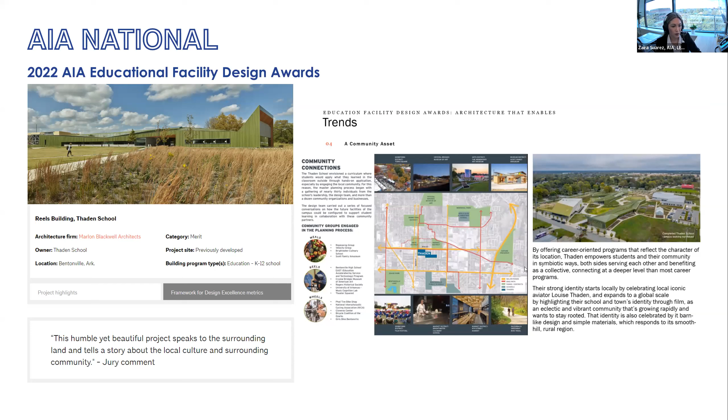You see here, I've included the images they offered in their presentation for the awards some weeks ago. We hope that this is something we'll learn a little bit more about with the presentation today.

A quick introduction: today we have Josh Matthews, AIA, who's Senior Associate and Project Manager at Marlon Blackwell Architects in Arkansas. With that, I'll go ahead and stop presenting and allow Josh to tell us more about the Reels building.

Well, hello. Thanks for asking me to join and talk about the Thaden School. It's a real privilege. As was mentioned, I'm Josh Matthews, a Senior Associate at Marlon Blackwell Architects. The PM, I've been involved in quite a few projects here in the last 6 or 7 years.

The Thaden School is a project that I was involved in from the very beginning. It's kind of a passion project. When we were approached to start looking at some of the programming and master planning, I was a part of that team, and ultimately was a part of each campus building and the overall project development and CA for each one of the facilities.

We've just finished up the majority of the work from the first couple phases in the last year. Today we want to talk a little bit about the work that we do, the region this building's in, and a little bit about the campus, but really wanted to focus on the Reels building, which is part of a larger group. So with that, I'll go ahead and get started.

We joke about this because Arkansas, as I said before, is pretty rural. We have a couple different regions across the state, really made more by different landscape features. We've got the Ozarks in the northern part of the state, a wooded, hilly area. We have the Delta in the center part of the state that extends into Louisiana. Right at the northwest corner of the state, we have the Springfield Plateau, which is actually probably more akin to Kansas and parts of Missouri and Oklahoma than any parts of Arkansas. That's where we're actually located.

When we were looking at how place impacted what we were doing, we knew the landscape was going to have a dramatic impact on the way we developed the campus. Because we were doing master planning on top of actually designing a collection of buildings, we needed to figure out what the motivations and inspirations were that we could find here in this place to help us develop this campus.

The campus itself, highlighted there in orange, is a 30-acre parcel. It's bifurcated by a small street, not quite a county road. We knew from the brief that the school wanted this to begin to feel far more like a college campus than a traditional high school campus.

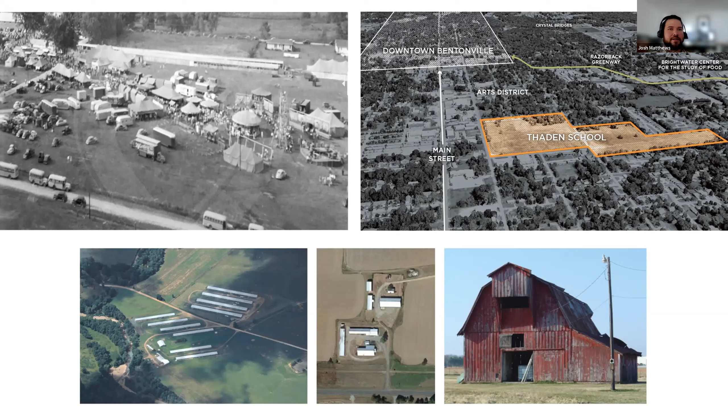I'd be remiss if I didn't mention this—we were part of an amazing team working on this project. We had Eskew Dumez Ripple Architects in New Orleans working on the master planning and some of the early programming, as well as the home building shown here.

We had Andropogon, a landscape architecture firm, working with us on all the landscape. Then Marlon Blackwell Architects participated in programming and landscaping, and we basically completed the other structures—the bike barn, the Thaden home, which is a relocation of Louise Thaden's childhood home onto the campus, the Reels building, the Wheels building, and the Performance building. So that's kind of the splits. We had an amazing team, and it was such an awesome process to work with such talented folks, and to come up with this.

When we talk about the different landscape components, we call it layering by design. You've got 30 acres and a bunch of single-level structures, and you also have a budget and a program target square footage. Really quickly you realize you're not going to create a ton of density with building, but you have to be strategic about creating outdoor spaces appropriately scaled to the adjacent buildings, and using openings, connections, and vistas between buildings to create a sense of connection.

One thing really important to the Thaden School team was that, like a college campus, this campus wasn't just a collection of one type of building slightly modified, but you could clearly see diversity from building to building. They saw that as a bonus—that you'd have maybe two different architecture firms and a historic house existing on the same parcel.

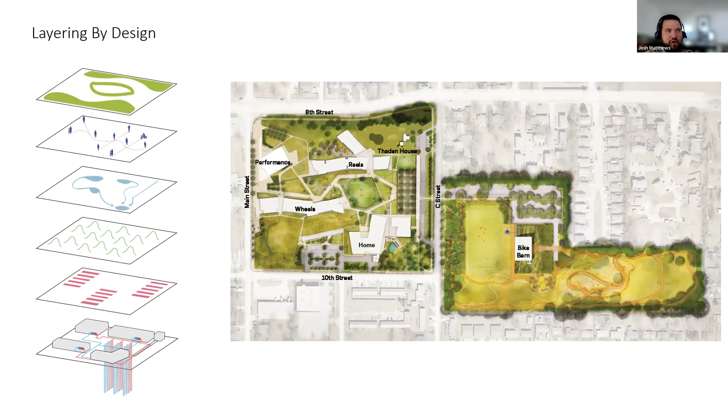It's important to mention the parcel is 30 acres, split into two parts. The team decided to keep it infrastructurally heavy on the western parcel and have maybe one structure on the eastern parcel, so we could have a denser portion of the site and a more open, landscape-oriented portion with strategically located parking areas, so you wouldn't be constantly moving through parking.

When all of that gets layered on top of itself, you begin to see a landscape that really created a lot of happy accidents, as we call them. When you're walking the campus, moving from building to building, there are natural vistas where buildings and entries of other buildings are naturally framed, and adjacent to those circulation paths there are lovely seating areas.

The way the gardens, the composting, and the cafeteria intersect with basic student and teacher circulation rhythms, it's just a really harmonious place to live. There's tons of activity, and it's a really cool place to be. It's all kind of out in public on display.

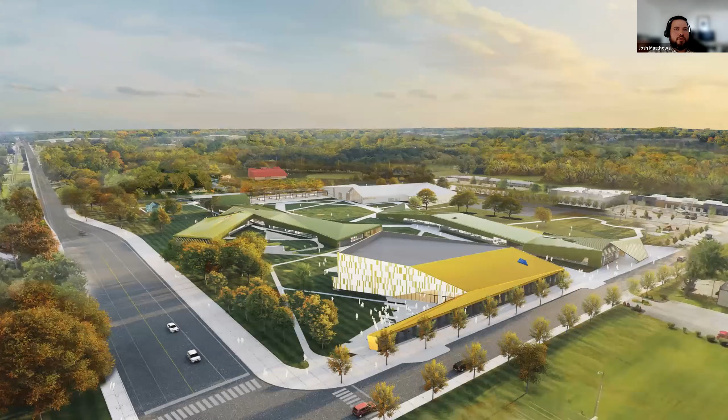This is some of the early ideas about what that campus would look like. You can start to see how the diversity of structure was really part of the overall richness of the campus experience.

So here's where we find ourselves today. This is actually right after we finished construction on the performance building, the gold and white building here on the corner. You can still see some remnants of construction around, and there are still some offsite improvements taking place that are in the city of Bentonville's court. These are the different buildings.

The bike barn, like I mentioned, was a project that we completed. The home building was Eskew Dumez Ripple. The Reels and Wheels buildings were the two classroom buildings that, although they look pretty crazy in overall form, are really kind of double-loaded corridors with classrooms on either side of each corridor, really simple. So it was a challenge to do something interesting that responds to the overall landscape forms, which we'll get into.

And then the performance building, which is really a world-class performing arts center that can be used by the community, but it hosts band, choir, and drama functions for the campus.

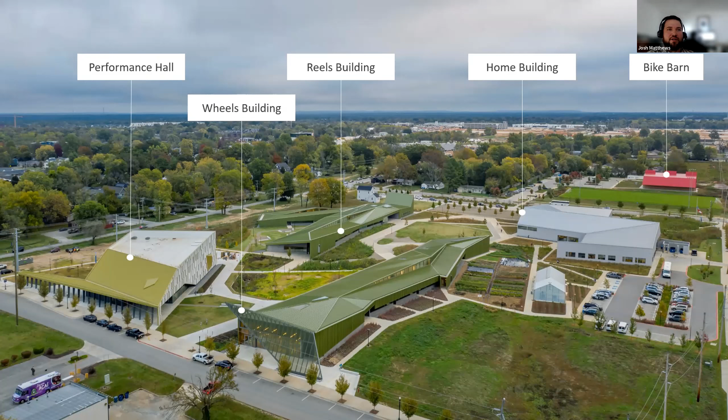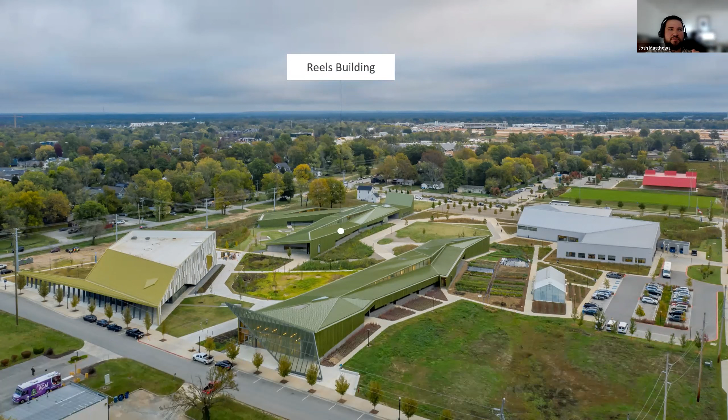For the sake of this conversation, we're really going to focus on the Reels building. I do think it's important to note that a lot of the DNA from this building ultimately impacted a lot of the other buildings on campus. So this will give you a little bit of a taste, but there are some other interesting things going on out here too.

I think it's also really important to note, from a phasing strategy standpoint, the Reels building and the home building, the white building and the green building, were the first two buildings to be constructed. The second green building, the Wheels building, followed by about 1.5 years, and the performance building was 2 years later, and the barn kind of followed its own path. So there was a lot of activity for a 4 or 5 year period here on this campus.

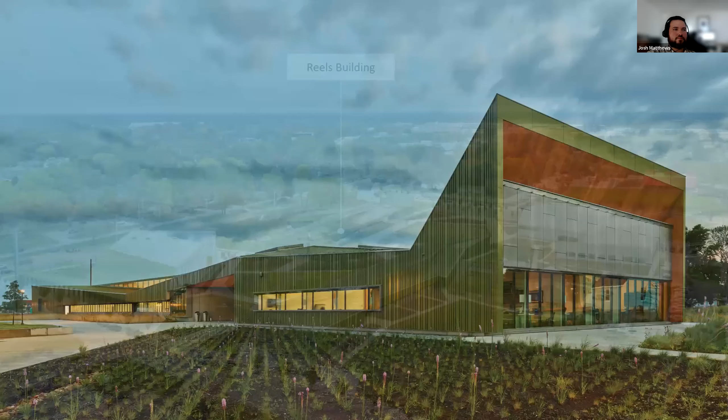Getting to the Reels building, its program was primarily the arts and administration building. This was the building that housed all the administrative functions for the campus. It had a lot of science classrooms, a large art wing, and then a Reels lab, which is kind of a recording studio. So it housed some basic classroom functions, but those are the core programs that were in this building.

One of the challenges our team was confronted with early on, and I know it's not unique to this project, was that the aspirations far outweighed the money available to build what you're seeing here. Although these buildings were relatively modest, we built this building for about $270 a square foot. When we first started talking to the school, we were lucky to have numbers showing anywhere north of $200 a square foot. So we knew we had some work ahead of us.

One of the things we talked to the Thaden School's leadership team about a lot was, if we're going to do this, we have to be really tactical about the material palette and really the construction method. We have to figure out where we can maximize value here.

Early on, without doing a lot of explorations, we knew we were going to have to use modest materials: metal panel, metal roof, all storefront, fiber cement panels, thinner than we would like to see, but I think they turned out nice. Then some marine grade plywood for all the ceilings, and a lot of gyp. So we had that palette, and we knew that was going to be the case. And believe it or not, all the buildings end up having a similar mix of that palette, that makeup. So that was something that was about how we could maximize those materials.

One of the things too - the building is obviously green. If you're in this part of the world and you tell anyone we're with Marlon Blackwell Architects and worked on the Thaden School, they'll kind of look at you blankly. But when you say 'oh, the green building,' just about everybody's face lights up with excitement or disgust - but everybody knows where it is.

The green was something we worked with Andropogon on, to understand the different plantings they would be using and the color palette the landscape would have throughout the year. There are some beautiful images in this presentation showing those Osage prairie grasses against the green building, and they're really quite spectacular. What's hard to capture is the way the color of those grasses changes and blooms throughout the year - I'd say every 2 months you're getting a different color, whether it's wildflowers or just things going dormant and turning different shades of brown. In some seasons the green really accentuates the color of the landscape, and other times it creates a lot of harmony with it.

Going back to that modest means and materials - this is just a simple box rib metal panel. Panels have done a bunch of crazy things in the last couple of years, but back in 2017 they were about as cheap as you could get in terms of building material. We knew we had to elevate the material, because just down the road there are warehouses using a very similar material system. Through color and the actual coating of that metal, we realized we could take something pretty modest and make it something special.

Right here you're seeing the northern face of the building. There's a great little sitting area and one of those porches carved out. This is actually the main entrance - if you show up to the campus and park in the parking lot and walk across the street, you'll end up walking into this porch. From this porch, you can go to either of the two north wings of the building or into the admin area. So it really ends up becoming the primary entrance for the building, through the center.

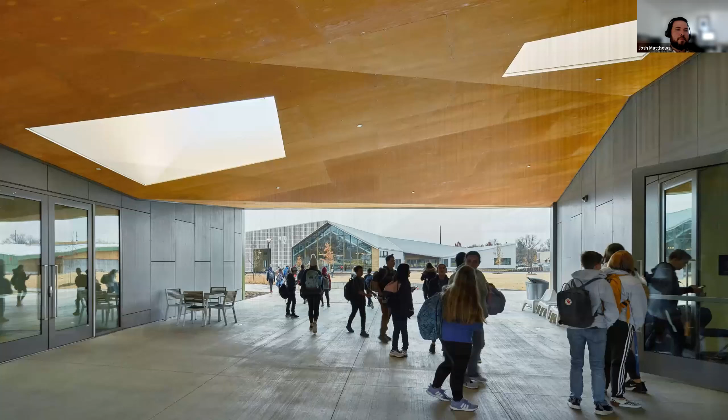The porches themselves are pretty great. If you go there, depending on the weather - if it's really hot, these dog trots have a beautiful breeze, and students and teachers are hanging out catching the breeze. If it's a rainy day, they're out here playing ping pong. Any other day of the week, they're having a science class in these spaces. These spaces really do create a lot of activity that otherwise would just be kept inside a building, in a back corner, which really makes the campus feel like it's constantly alive.

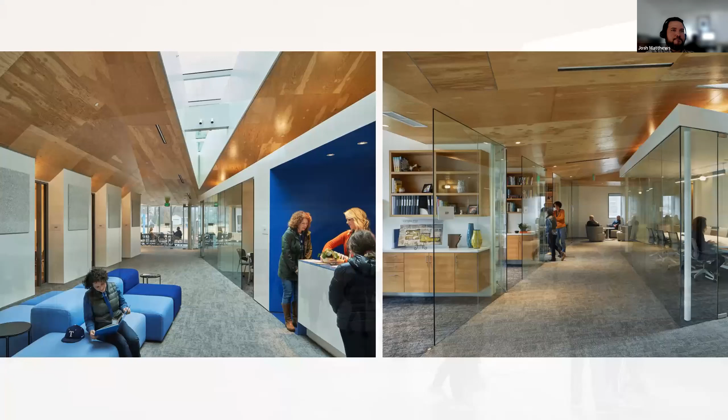So the admin area, which would have been that area to the left, moving to the east, was also something we put a lot of thought into with the school leadership. How could we create spaces that would really encourage student and teacher overlap and interaction? Creating admin spaces with lounge areas and large meeting rooms where teachers could be accessible by students. Students could come in, have questions about homework, really just have life-related questions, and they would have the spaces to casually sit down with teachers and ask questions. Hopefully those kinds of conversations would lead to more meaningful conversations about careers and life. It was really intended to be very welcoming and transparent, so there was never this idea that teachers could slip away and hide from the students - they were always accessible.

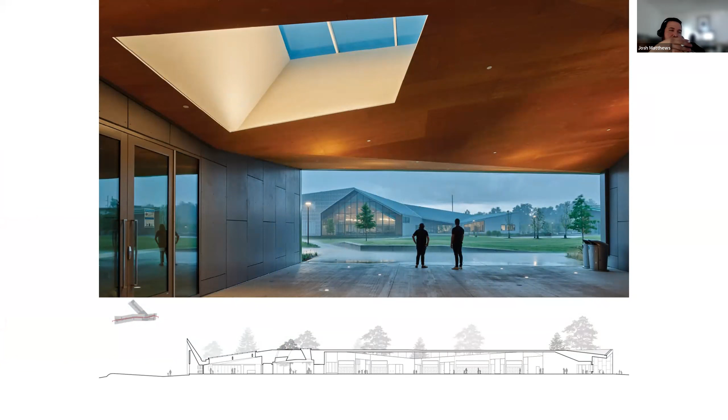Making sure that - you'll see a trend of this - deep within the center of the building mass, we were bringing light into those spaces, making sure that daylight was really getting deep into those porches and classroom areas. And like I said, even on a downpour, it's not a bad place to be.

I want to talk about one of the strategies we employed, which goes back to some of our early conversations with the Thaden School leadership. We took a quick tour of some independent charter and public schools in the area with school leadership, and one thing that was so interesting to these educators, which we never thought about, is they said if you talk to faculty and students, really what they'd say is...

All of the activity and conversation and life within a school building takes place in the corridor. Yet they were shocked at how little attention architects would pay to those corridor spaces. They were just very utilitarian, helping funnel people from one class to the next. They really weren't spaces you wanted to be.

Knowing we were starting to shape these roofs and deal with scalar issues, we saw that as an opportunity, from two perspectives, to begin peeling those roofs away, using that pitching and rolling to introduce clerestory lighting, which would bring light into the core of the building, into the spaces with all that activity. So we knew what we wanted to do.

Early on we were working with our mechanical engineer, CMTA, another wonderful team member. We started pitching ideas about daylighting strategies that you could sketch out on the back of a napkin, and talking about bringing daylight into the core of the building.

There are some great other facilities on campus, and there will be some more work—I think Architectural Record is doing a spread on this soon. We've got some literature coming out. It's a great place to see. If you're ever in this area, look us up, we'd love to take you on a tour. It's been a lot of fun to work on.

I think just seeing the way that students almost gravitate towards some of these spaces—as a student, when I was younger, I didn't really have that connection with the places in which I learned—but you're seeing how architecture really begins to change the way that students think about the places they spend a lot of their time in during their formative years.

It's kind of the campus as it sits today. Obviously, construction—all of this is green now. There's not a lot of dirt patches anymore.

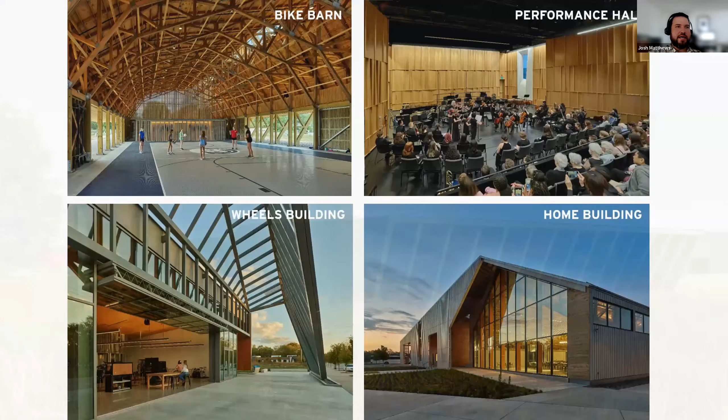Absolutely, let me go back a little bit here. Actually, this may not be a bad one to talk through. Early on, the athletic program knew they wanted basically soccer fields, and that's actually what you see here next to the barn. The barn itself was really supposed to be kind of an athletic pavilion for soccer fields—it's an open air structure with some conditioned enclosed lockers and bathrooms. So on a hot day or a rainy day, the porch of the barn would be a place where people could be out there and watch a soccer game.

What's interesting is this has kind of changed. It's been a few years, but there's now a cyclocross course, which you can kind of see here in the corner, and there's regional cyclocross events that take place here on campus—it's kind of the bike barn now, so the barn itself is the backdrop for those activities. What's actually hard to see in this image too is this 15-acre parcel on the eastern parcel has another bike skills course. So there's some bike-related athletic programs that are starting to find their way into this region, and believe it or not, there are other states and other schools participating in some of these events. That's been kind of cool to watch evolve and grow.

I think, knowing they were starting a new school from the ground up, they knew the athletic program was going to have to grow with them, because in Northwest Arkansas, football is king, and they don't do that, so they knew that was going to be a challenge. We're actually talking to them right now about an athletic facility so they could do basketball, because they now have a basketball team with really nowhere to practice. The barn has a basketball court in it, but it was really more a place for, as Dr. Marsh said, students to burn a lot of energy. So the athletic piece is kind of ever-changing, but they do have a regulation soccer field and some pretty nice facilities to support that. The rest is just an ongoing dialogue as the school body grows—what people want to see and where they're putting their money. So I don't know if that answered the question, but yeah, that's ongoing.

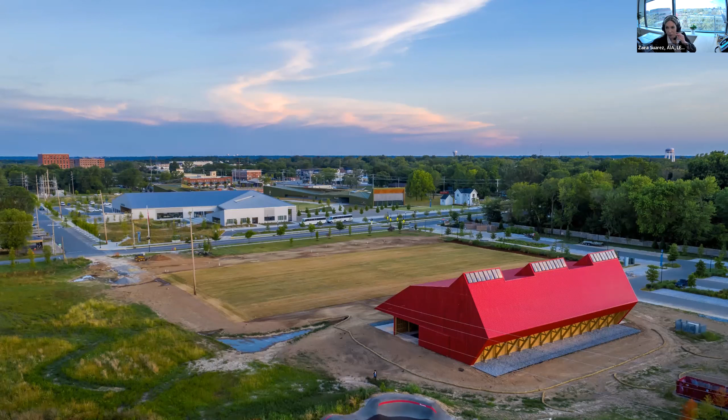Anyone else would want to ask anything?

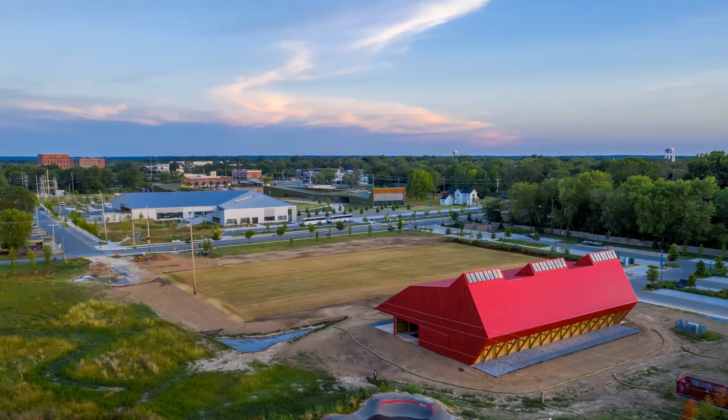I just had a quick question, and I really appreciate the time you put into the reels. That front part really reminds me of one of those camera attachments. But I was really curious how you dealt with the water, with that slope on the roof, and the drainage there.

This one right here, you're talking about this image? Yeah, with that slope there. So here's actually what's super interesting.

It's actually completely hidden in this view, but if you look in the grass here, there's two gravel runnels. There's a really large gutter right past the line of the glazing, which you can't see here but probably could in an aerial photo. All the water running off the roof hits this large gutter and daylights above grade in the last two bays, draining to an area drain that slopes to the area where this photo is taken, which is actually a few feet lower than the building — it's a retention area, and it drains that way. It flows that way, and you can kind of see it in this image too.

It's a great question about the water strategy. The building itself acts as an overflow — the entire perimeter of the roof has about an 18-inch by 4-inch roof drain with drains at the low points. When those drains get overloaded, the water pours over the edge of the building. In the landscape, there's a gravel skirt in some areas, and in others, area drains or rain gardens. As you walk around the building, there are areas where we dealt with each of those scenarios a little differently. In this particular case, there's just a large gutter that was piped into this and then onto a rain garden.

Very good, I got one. Josh, have you heard anything unrelated to this project — people in a community setting talking about community amenities, saying we should do it like the Thaden School? Are people referring to the effect of this project in some other context, recognizing a piece of it's successful, or something they've seen or interacted with?

I'd say in two very specific ways, the answer is yes. I wouldn't say everything we thought would become a communal asset has been perceived and used that way. The exception would be the bike barn, and the way the pump track and cyclocross track is used on weekends. That whole area has been seen, perceived, and used as an open communal asset. There have been some security challenges, and the school has to monitor that activity and make sure the facilities are unlocked, but it's become a bit of a communal hub.

The other thing is the Wheels building in this image, with that large folding door — this is their bike lab that opens onto Main Street, the westernmost street. The idea was that it would be a place for students to disassemble bikes and do different work; it's got a metal and wood shop. But as an educational tool to get community members excited about riding bikes, they actually hold workshops here — not necessarily run by students or faculty, but by other community leaders, like people who own bike-related tourism businesses or bike shops, who come and hold a workshop. They use it as a bike-related educational classroom space.

Even simply as a landmark-looking building because of the way it sits on Main Street, there'll be little flyers around town saying, 'show up here for Saturday morning's ride' — little things like that. I'd say that was very organic. The hope was that we provided the structure and infrastructure that would make those things happen, but it wasn't like a week or even a month or two after we finished the building that people were saying, 'we gotta go hang out at that place.' It started slowly and organically, but you're now starting to get that murmur of how these spaces are being used.

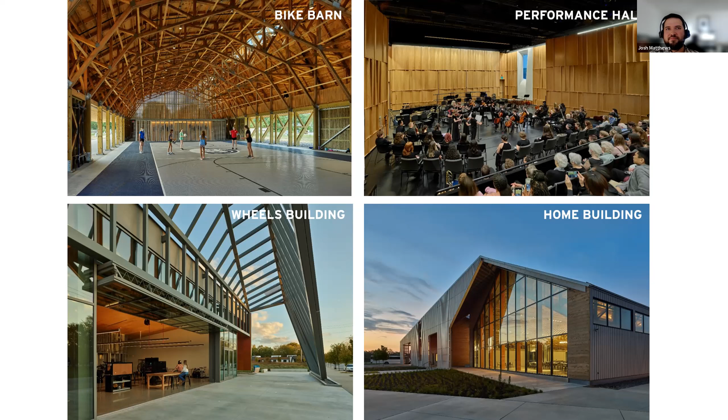It did— I'm sorry, can you hear me? Barely. Zaira, we have an echo. Okay, can you hear me now?

I can, okay. We have a couple minutes here, but I did want to ask, it seemed like in your original planning, kind of dissected plan there, you were showing geothermal wells. So you do have a very active sustainable portion of this campus.

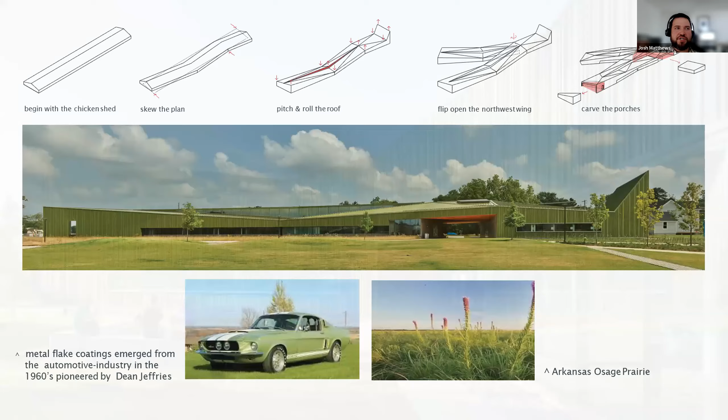Absolutely. Yeah, so there's a few things like the daylighting and the analysis and some of the electrical, like plug loads, we did extensive work on. That was something that, even the sub-metering of panels, we did all of that. Actually, CMTA checks in every other year just to see the kind of consumption the school's using. Geothermal was something we had conversations about really early, and that was something they invested in, and there's been a huge payoff to do that, even though it's pretty uncommon in this area. We had a lot of conversations about not necessarily passive systems, but just having a lot of access to natural ventilation. That was something that sadly kind of got VE'd through the process, but that was in the job early on. It was really just primarily photovoltaics that didn't sit well for some reason. But yeah, there are some sustainable strategies here, water collection and movement. We didn't go through the LEED scorecard, didn't do the LEED documentation on this, but I think we could have probably gotten a pretty good score on it. And there's some politics associated with that, because there are other facilities here that—well, it's a long story—but yes, we did everything we could without going through the actual process.